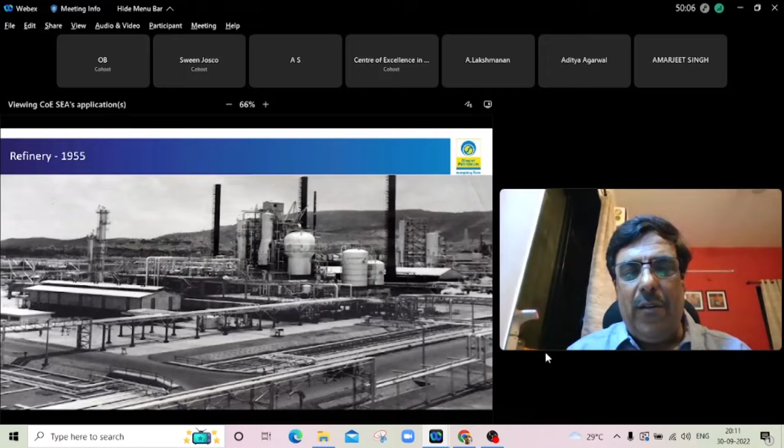So that brings safety to the paramount, safety measures, safety standards, safety management. Every step we take in the refinery speaks of our safety standards. And we are also a very, very environmentally conscious refinery.

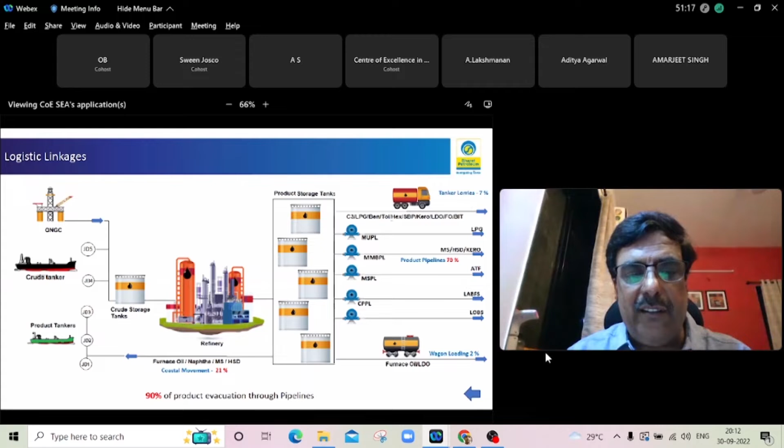Now, coming to this important topic of process safety management: why at all do we require process safety management? Why is it that we pay more attention to safety? Why is safety now non-compromisable? Why has safety got paramount importance in everything that we do? How does safety affect us, how does it affect our fellow workers, how does it affect the community at large?

Basically, as the saying goes, safety starts with us. But when you are working in a company dealing with a multicultural, diverse group of people, we require a proper process in place to take care of safety.

Process safety management also helps us develop a system for safety, so that whether it's a staff member, an officer, or a chief general manager, it is immaterial—when the process is in place, the process will take care of the requirements. Any worker occupying that post will know what is to be done, and the system will take care of the safety requirements. One needs to respect and obey the system. That is why safety management in oil refineries is very important, and the concept we are going to talk about today can be extended to any industry.

Can we move, Sween? Yeah.

There have been a lot of incidents, a lot of things that have happened in the country, in the world. The Bhopal disaster in 1984 caught us unawares, and we had a bomb sitting in the middle of the city, but nobody knew it was a bomb. Once the methyl isocyanate escaped, there was no way it could be controlled. Nobody knew how it could be controlled, and what sort of damage it would do. So this was a wake-up call in 1984, but the wake-up call came at too much expense that cannot be quantified. Of course, there's also the Piper Alpha platform, where 167 people lost their lives, and the Flixborough disaster, where 28 people lost their lives. These are all recorded catastrophes, but there are many catastrophes, many damages that happened which were not recorded. But these are all standing testimonials on why one should improve safety in the refineries.

So what is the one common thread connecting Bhopal, Flixborough, and Piper Alpha? It all indicates the lack of process safety management, the lack of procedures, the lack of systems, and disrespect to the alarms, disrespect to the values shown by the dial gauges, pressure gauges, and no proper documentation was done, no proper handing over and taking over of shift duties. One can go on and on, but what we are now trying to do is bring all these concepts, all these practices into a structured program called process safety management.

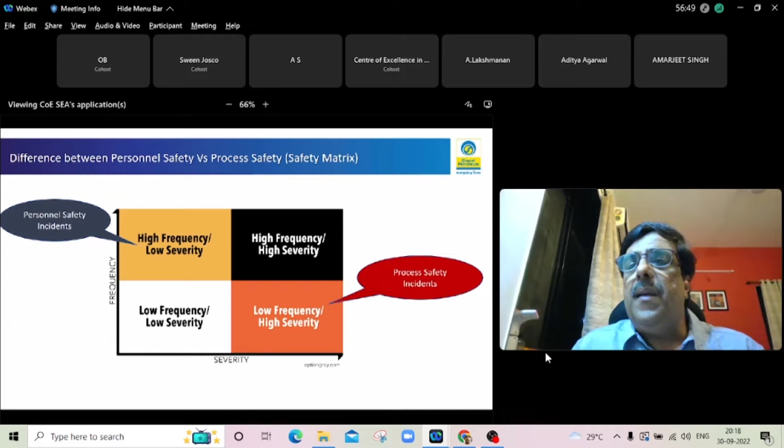I also want to tell all my viewers that wherever I have taken data from published journals and authors, I will be giving the credits at the end of the slides.

Okay, now let us move on to the origin of PSM and where we are today. I'll just touch upon the process or path that we have followed till date. The Center for Chemical Process Safety is called CCPS. This is developed by the American Institute. They laid the foundations for process safety management in chemical industries - meaning chemical industry, petrochemical industry, oil refineries, and everything that has got to do with chemicals. They created 4 foundations for the CCPS.

One is, what is the commitment of the industry towards process safety? How do we understand the hazards and risks? How do we manage safety? And what do we learn from this experience? Finally, how do we apply these experiences in our day-to-day life, and what changes are we going to make to make the workplace a very safe place. They had designed 20 elements, and these 20 elements are broadly divided into the 4 major topics that I mentioned on the right side.

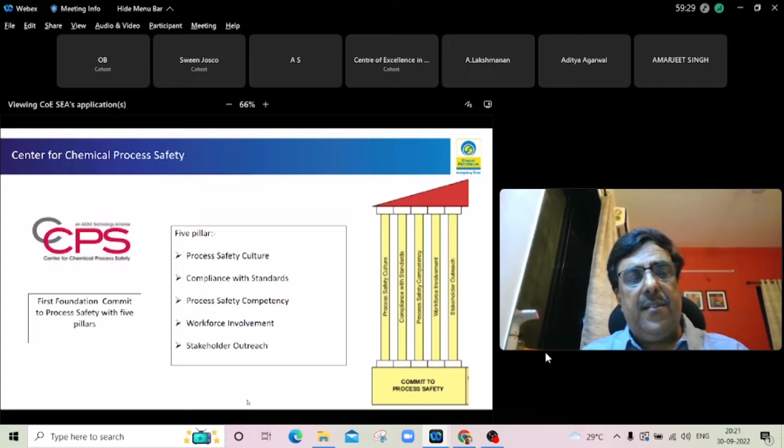The second foundation is to understand the hazards and risks, broadly defined in 2 pillars. One is process knowledge management - how deeply you know the process, how to identify hazard and risk analysis, and how we expect personnel to know what risk is and how it is qualified and quantified.

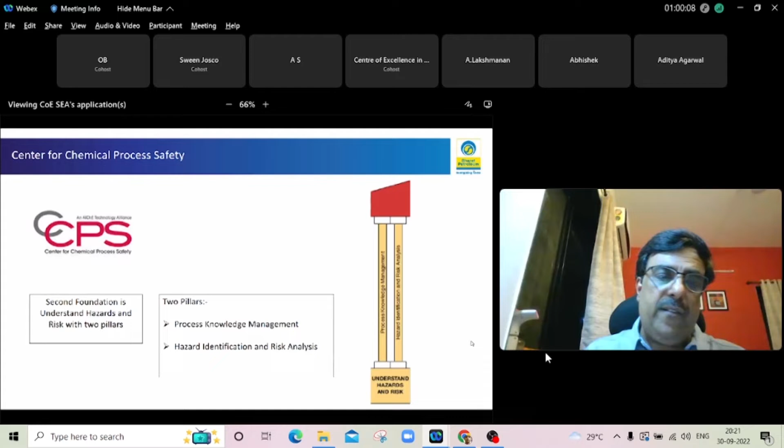The third foundation is managing the risk. You've identified the risks, now you need a strong support system for managing it. How will you manage a risk? Supposing you've identified a risk, how do you manage it? You should have very strong operating procedures, very safe work practices. This includes a robust work permit system.

You should have data on asset integrity and reliability. You should educate and train contractors on the safety standards to be followed inside your refinery. Continual training, performance assurance, retraining, relearning is to be established. A very strong management of change procedure has to be maintained. Even if you touch a small valve in a process plant for repair, it should be governed under a management of change, and immediately updated in the P&ID.

How ready are you to operate this plant 24 hours? What tools do you require? How do you conduct operations safely and effectively? What is to be seen, how is it to be seen, and how do you use your sense organs - smell, eyes, ears - for effective safety management? And last but not least, how do you effectively manage your emergencies?

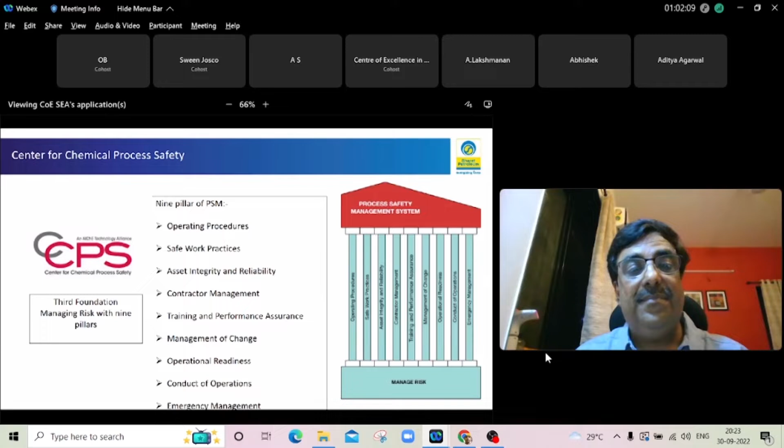The fourth foundation is learn from experience. This is very important because if you have a near miss or an incident, you do root cause analysis - what do you learn and how do you apply that learning in the manuals and procedures so these incidents don't repeat? Here we rely on four pillars: incident investigation, measurement and metrics, auditing, management review, and continuous improvement. These are the four pillars under learning from experience.

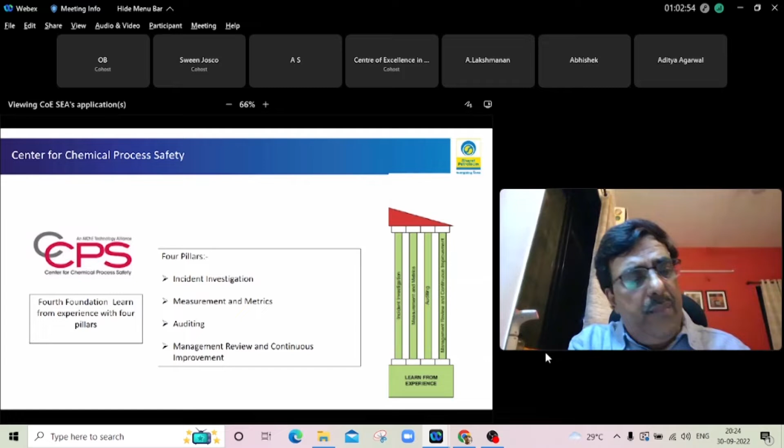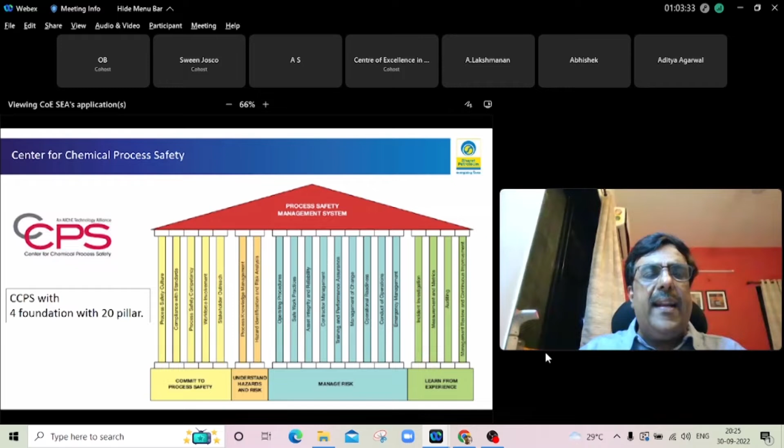So finally, when you build this strong fortress, you are building a strong fort managed with 20 pillars of safety built over commitment, understanding, management, and learning. This is how CCPS has designed process safety for the chemical process industry. Now, once this basic foundation has been laid by CCPS, how do we take it forward and make it adaptable? This is what we'll see in the next couple of slides.

The Occupational Safety and Health Administration, OSHA, from the US government, has adopted CCPS in its 14 elements. Whenever going in for OSHA certification, it revolves basically on these 14 elements, drawn from CCPS, renamed in a different way. These include process safety information, analysis, operating procedures, hot work permits, emergency preparedness, integrity, startup safety review, training, management of change, investigation, contractor safety, audits, involvement, and trade secrets - everything is covered under OSHA.

OSHA normally puts this in the form of a circle so that the axes cut across each other, showing all elements are interrelated. OSHA differentiates it into three types: advanced risk assessment, control of work, and health and safety management.

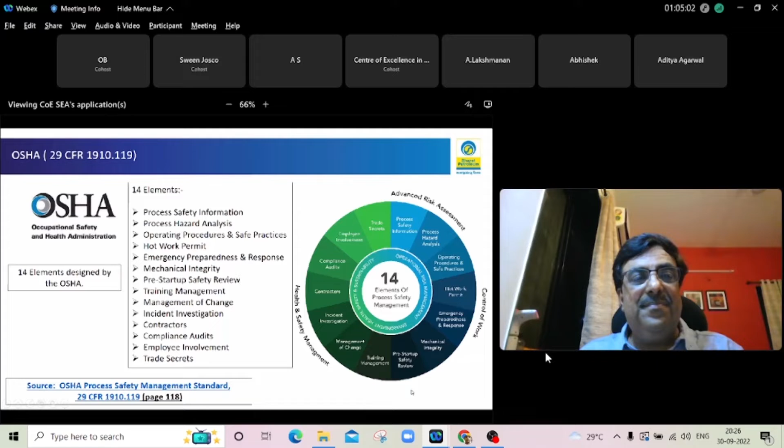Coming to the next stage, the American Petroleum Institute has developed API 754, a recommended practice for process safety, divided into 4 tiers - a pyramid of safety. Tier 4, the bottom, stresses operating discipline, management system, and performance indicators. Challenges are factors that pull the safety system backward. Then come events of lower consequences, and events of greater consequences. So from bottom to top it's lagging indicators, and from top to bottom it's leading indicators.

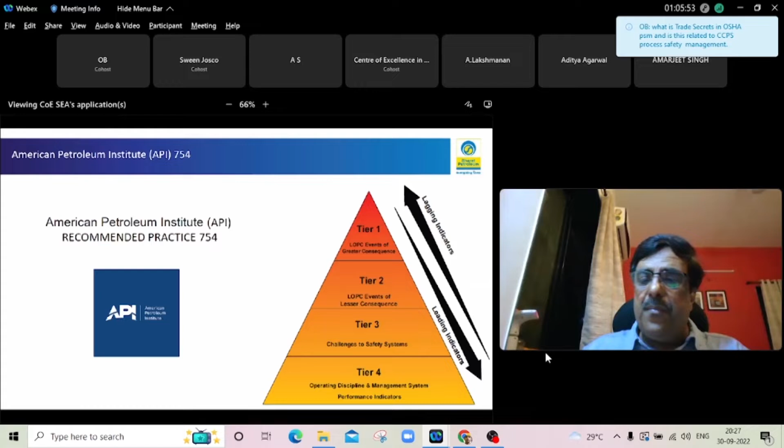Now, having got everything, how do we compile everything into one platform and how do we go about it? This is where the role of senior management comes into the picture.

At Bharat Petroleum, after deliberations for over 4 or 5 years across our 3 refineries, we have concluded that the role of senior leadership in PSM implementation is broadly divided into: creation of a vision and mission statement, required element implementation on industry scope, selection of the correct element owner for steering individual elements, periodic review, walk the talk, KPI targets and status, review and audit, periodic gap analysis, and way forward and action plan.

Also, very happy to tell you that at Bharat Petroleum, safety is directly related to the performance monitoring or yearly target setting or yearly review of each and every staff. One element is always given for safety, and the commitment that he or she demonstrates in safety will fetch them more marks than their competitors.

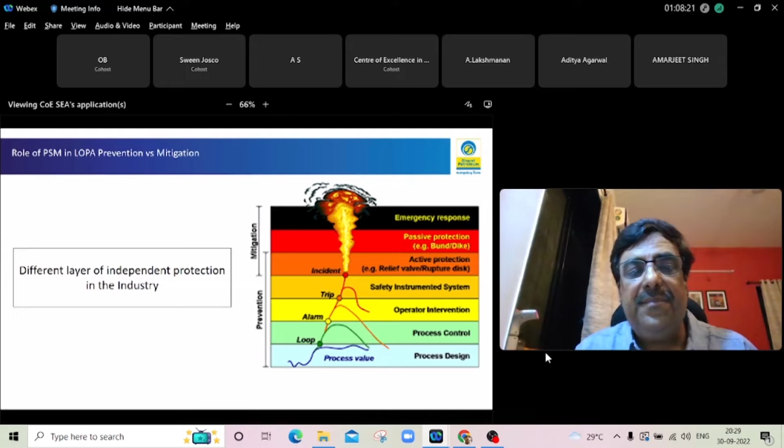Next, now we are coming to some specific slides on what we have done at BPCL Mumbai Refinery. How is it that we have combined all these things, and what is the journey of PSM at Mumbai Refinery? Ultimately, there may be a lot of theories, a lot of books, a lot of material to learn, but what is going on in the field, that is more important. The next few slides will describe what we have done at BPCL Mumbai Refinery.

Next. So as usual, the process safety management was launched as early as 2020, and we had a vision statement in 2021, wherein we aspire to be a global role model by building a sustainable process safety capability culture and strive for net zero, for achieving zero process safety events by engaging all stakeholders.

And we try to adopt the best process safety systems. We adopt the best process-centric, safety-centric approach to design, operation, and maintenance, develop the necessary competency amongst all employees, and ensure availability and reliability of process safety barriers at all times.

This is our mission. This is what has been accepted, and we have taken a pledge that whatever we do, it will be governed by these basic principles. As you can see, the mission statement and the vision statement itself now combine many elements that CCPS and OSHA have given us.

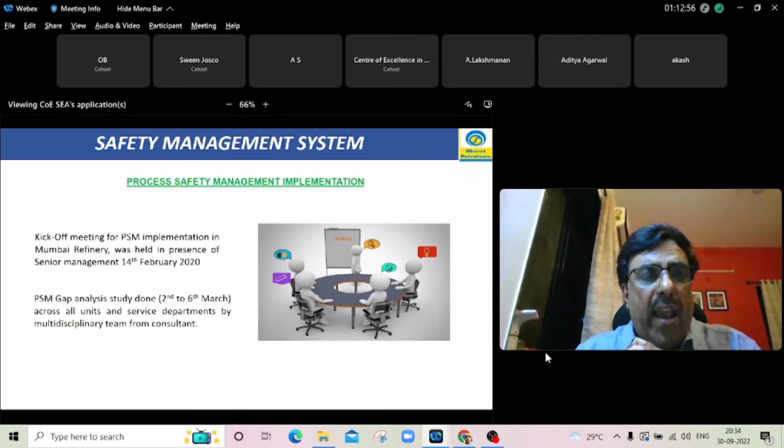So how does BPCL's framework look like? We have taken the essence of CCPS and OSHA, and rejigged the entire triangle into 17 elements. If you remember, the earlier fortress had 20 elements; now we have rejigged that into 17 elements.

The first set of pillars is commitment to process safety, wherein we have management commitment, measurement and metrics, and employee participation. Understanding the hazards and risks, we do through proper process safety information and process hazard analysis. Then the next one is the core.

It gives how to manage the risk: operating procedures, work permit procedures, mechanical integrity, contractor safety, training, process safety competency, management of change, startup procedures, emergency response plan, and hydrocarbon storage and loading. These are the pillars that we concentrate on to manage risk.

And incident reporting and investigation system - for all three refineries, this IRIS, the incident reporting and investigation system, is computerized. Even if a person trips or falls down, that is captured by the IRIS system, and we have a root cause analysis for that also.

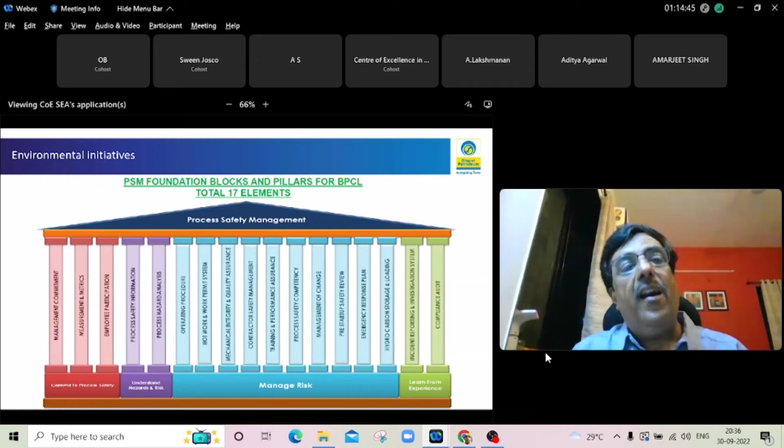We are very happy to say that the Director and CEO of the CCPS, Dr. Shakeel Kadri, visited Mumbai Refinery and went through our systems, and he said that probably BPCL has understood and adapted the CCPS system in the best possible way as far as his experience goes. We are really inspired by this visit, and even today this gives us the motivation to go forward.

Now this brings to some - I have given you some idea about how process safety management is done in the refinery, particularly at Mumbai Refinery. Now I will go into one incident which triggered the need for all these things. This is a live incident which happened in one of our refineries in the year 2018. So I will just go through that incident.

This happened on 8th August 2018 in Mumbai Refinery. There was a fire incident in our hydrocracker. As viewers know, the hydrocracker is a unit operated at very high pressure, about 180 kg pressure or 180 bar, which desulfurizes the vacuum gas oil and splits it into distillable components like LPG, kerosene, diesel, and unconverted oil. The unconverted oil goes for LOBS production. This hydrocracker is a money spinner for the refinery.

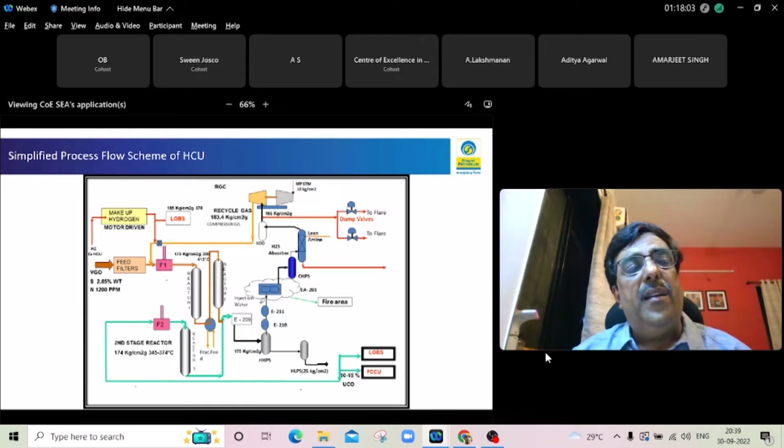You can see in this slide that there was a crack in the air fin cooler. The crack gave way all of a sudden. Please remember, this unit was commissioned as early as 2006 and had been working for so many years without any problem. In between, every 4 years, we take the annual turnaround and inspect every inch of this plant. But still, we were all baffled as to how this equipment could crack.

So basically, the fire was caused by a weld crack. Now, how the weld crack developed is a very interesting description, which I'll tell you in the next slide.

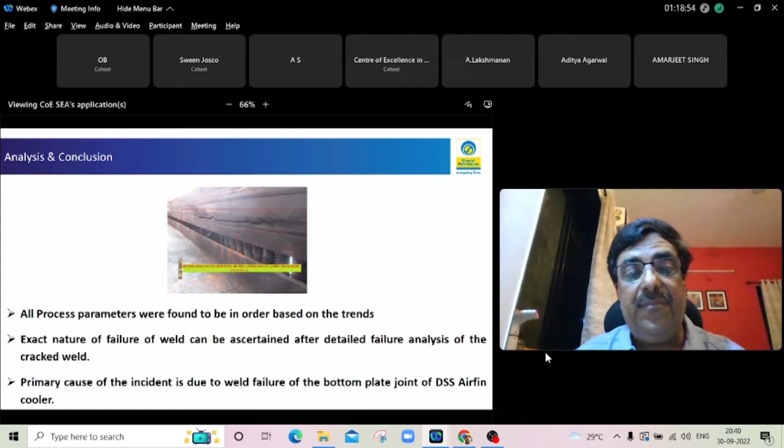What happened is, when this plant was commissioned in the year 2006, this air fin was ordered from a reputed vendor, and there was a third-party inspection. This was cleared and it was in operation for so many years. But there was a manufacturing defect in this, which had gone unnoticed from 2006 onwards. Over a period of time, there has been a very, very slow propagation of that damage, which led to the ultimate incident maybe even 15 years later.

What I am trying to emphasize here is that we may assume that whatever has been supplied meets the best of standards, the best of practices, the best of third-party standards. But it is our experience that even in such cases, if the party from whom you are buying the equipment does not have a proper safety management system, you can be the victim. That is my submission here.

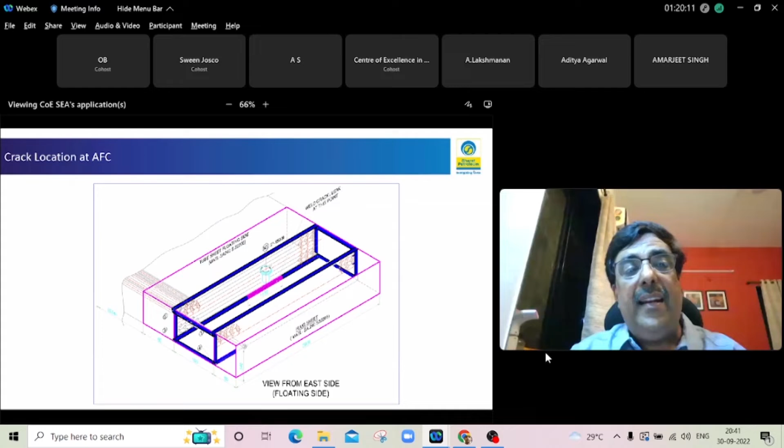So basically, that comes to the end of my talk. A short talk, probably. I have given introductions to many topics here, many theories here. Whatever I have told here, I am just giving you the credits and references. I have taken it from the CCPS, OSHA, API sites, and LOPA, and from BPCL incidents, for which I have got permission to reprint them. So basically, this brings me to the end of the talk.

And again, I submit that whatever may be the nature of our business, whatever may be the products we produce, process safety management has to be deeply integrated into our DNA. For each and every job that we take in the refinery or in any plant, it should be done under proper guidance, proper procedures, proper permits, and proper supervision.

Safety is a continuous journey. Process safety management shows us the road, but we have to travel it. The road is long and winding, but we have to cover this long journey kilometer by kilometer. At every kilometer, we have to review whether we have come safely, then plan ahead for the next kilometer. This is a journey which will continue as long as this world supports process industries. Thank you very much.